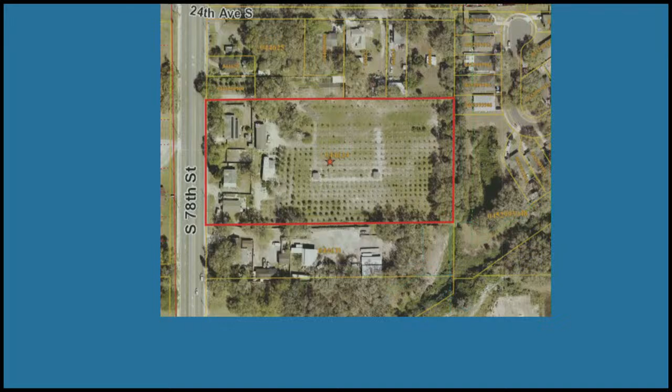Located in the southeast part of the county, north of Causeway on 78th Street, a little closer view on 78th Street. Zoning in the area is RSC 9, which as you can see is somewhat the predominant, and then you get into more intensive categories of CN and CG, which are pink or orange on the map. Future land use categories primarily are all R9 in the vicinity and R20, which you can see in the map somewhat in the vicinity.

Outside the coastal high hazard area, some policies that are germane to it include locating housing with transportation infrastructure. The site is located directly on one main route of Hart, which runs out to Brandon and downtown.

This would encourage a variety of housing types and provide a different type of housing stock in the immediate area to diversify housing stock.

Other policies are to encourage new infill and redevelopment compatible with existing community patterns, and encourage availability of affordable, attainable, privately-owned housing stock that is safe, decent, compatible, and accommodates all modes of transportation, which we indicated is located on a main bus route. Under the Greater Palm River Community Plan, it is located as shown here on 78th, which is a mixed-use business, office, and residential pedestrian-oriented development area.

We appreciate your attention and are happy to answer any questions you might have.

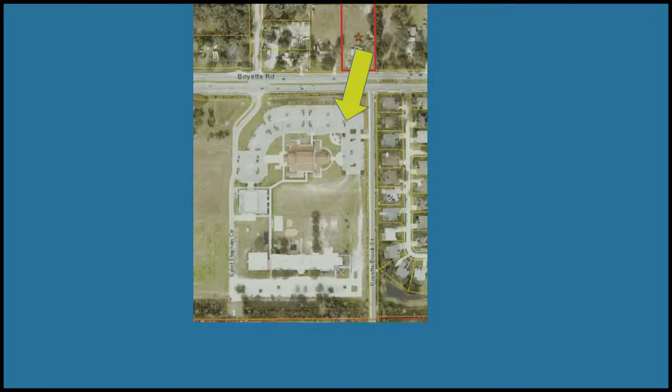Now what's important, and really the biggest change in the area, is directly across the street, which is the church, which has quite a few extensive uses. It is quite a large campus and quite a large impact.

That was approved under RZ000622. You can see there's quite a wide array of uses approved. Looking at their site plan, directly across the street is a sports field, 58,000 square foot school, 16,000 square foot field house, 31,000 square foot Parish Life Center, 7,100 square foot youth building, office, church with 300 seats, and a 105 bed ALF. So it is quite extensive and quite impactful.

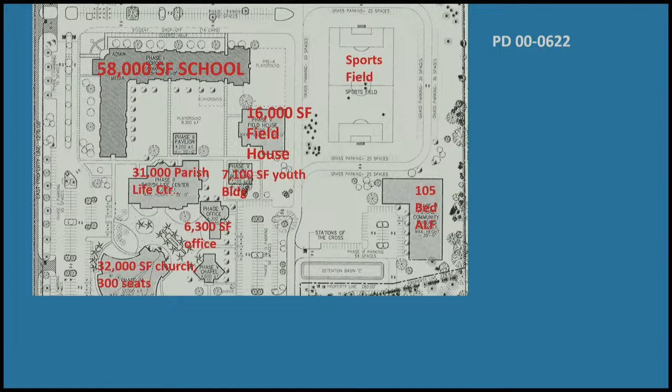As that came through the process, very importantly, there were no residential appearance requirements as were required across the street. The condition is specific that they just be architecturally finished on all sides, which is much different than what's occurring on the site before you.

As this came through 000622, both land use staffs approved it. The zoning administrator found it approvable, and the planning commission found it consistent.

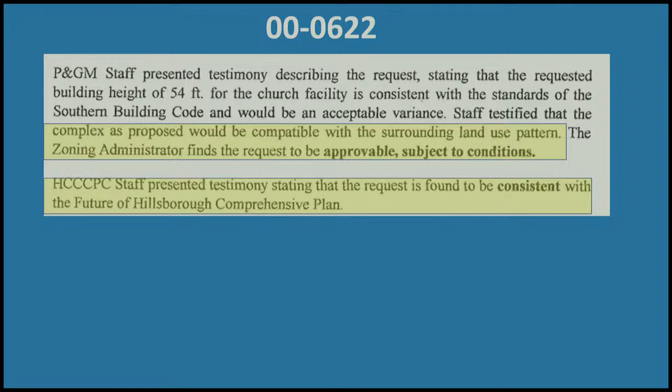As far as we can see, the uses proposed here are basically the same intensity as across the street. They have quite a large sports field and a 600 student school, and what's proposed here is small in scale: dance studio, health practitioner. They're not the same, but in terms of what was approved and supported by the entire county, basically roughly the same.

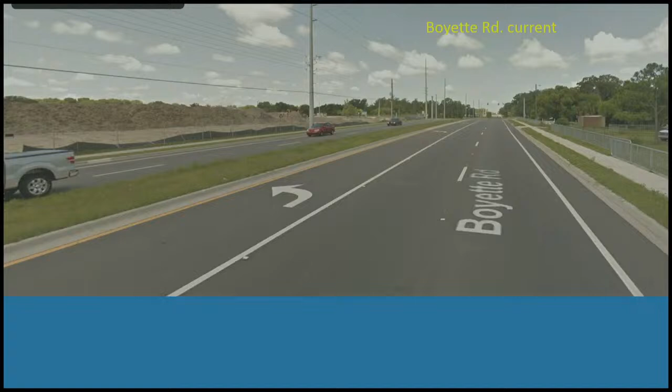Now, we don't meet locational criteria, but we placed a waiver based upon the evolving advancements, the changes, the expansion, the allowed uses, and the intensity that has occurred over almost two decades. The Planning Commission report notes that's basically how we justify these changes.

They refer to it strictly as the business properties and church across the street, which I've shown you is actually much, much more, many times more than just a church. Development Services notes the surrounding uses are single family, institutional, agricultural, office, and commercial scattered along Boyette Road. We think that's a definition that's within the ballpark.

Planning Commission has a different view, referring to the given surrounding residential and lower intensity office development pattern. When you look at the Planning Commission report, they look at what's to the south as just educational, although we've shown it is many times the intensity, many times the usage than just educational. They note to the east, single-family residential agriculture, although that's changing, and to the west, single-family residential, which is also changing.

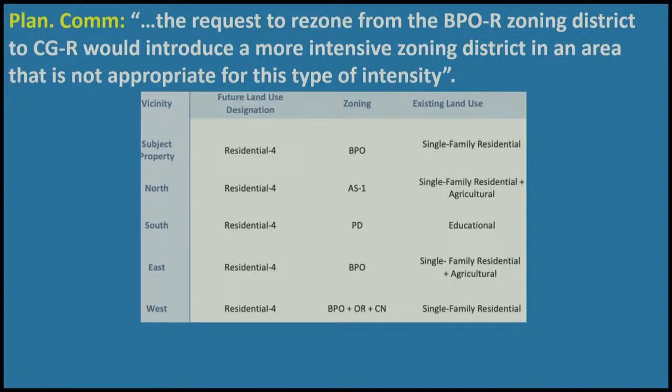The community plan under the residential district vision does note that managed growth does permit higher densities, which we believe supports the increase of FAR from 0.20 to 0.25.

The Planning Commission also notes that Res 4 allows for the consideration of many uses: residential, suburban scale neighborhood commercial, office uses, multi-purpose projects, which we meet. Yet at the same time, they say the intent of the residential 4 category is to designate only low-density residential development. So with respect to the Planning Commission, we look at how they are presenting that Res 4 category, and clearly it is the first that does allow suburban scale neighborhood commercial.

We are a little bit at odds with transportation. In our posture, this is a standard application. No transportation study is required for submittal. The issues they raise are to be addressed at permitting and site planning.

They are indicating that they feel a right turn lane is required. We did look at that quickly as we got those comments, and our transportation consultant, who I asked to look at that, said no, that would not be required. Driveway spacing, Euclidean—all those projects with driveway spacing go through a variance.

It's very common, but those are issues, as far as we're concerned, that are to be handled and looked at and considered after a zoning entitlement under standard application. So with that, we feel that when you look at the whole site and the uses approved and supported by the county, this is a request that is compatible and cohesive.

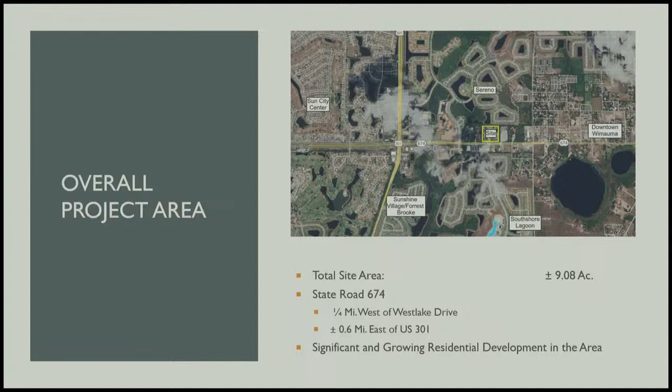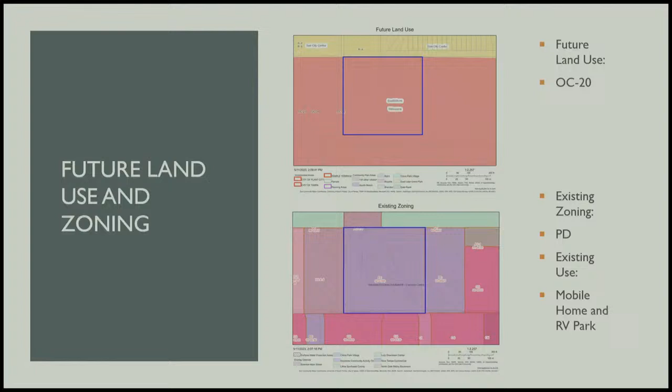The existing future land use is OC20. The existing zoning is a PD. The existing use is a mobile home and RV park.

As far as what we're proposing, there are 2 options. The first option is simply to maintain the RV and mobile home park as an interim use. Mainly that was required because otherwise it would be a non-conforming use once the project gets approved. So the main project proposes 10,000 square feet of office, 21,000 square feet of retail, and 105,000 square feet of mini warehouse.

We've worked on this quite a bit. The Wimauma downtown plan is very exhaustive. There are many things in there, so we have really made a lot of changes to the plan.

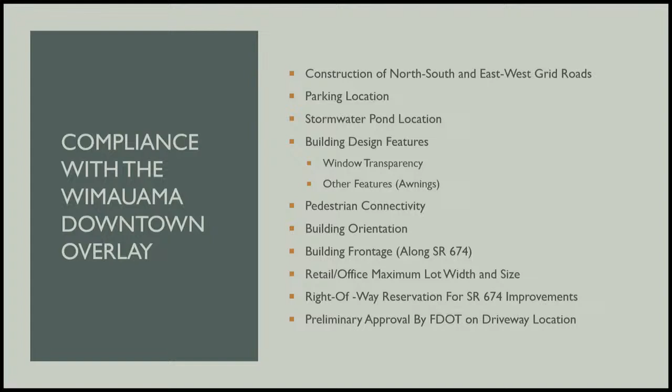They include that we are not just dedicating right-of-way, but we're building north-south and east-west grid roads that are called for in the Wimauama plan. We're compliant with the site planning as far as parking locations, stormwater pond locations, building design features, pedestrian connectivity, building orientation, and building frontage along 674, as well as retail and office maximum lot size and width. We're providing 26 feet of right-of-way for future widening of State Road 674, and we have preliminary approval by FDOT for the driveway location.

Because the Wimauama plan is so exhaustive, we worked it down to where we just have a handful of waivers required. They mainly apply to the mini warehouse. For example, the code has a maximum lot size and maximum lot width, and because the mini warehouse won't fit those standards, we're asking for that to be waived.

We're asking for an increased building setback also for the mini warehouse. That is mainly due to site planning—we need a drive that circulates around the building with loading, and then you would need buffers and a sidewalk, and so that's why we needed to ask for the increased building setback. There's also increased door separation, in case the mini warehouse needs a door further apart than 75 feet.

We're requesting one variation, and that is just for the scenic corridor plantings. It's not that there won't be any plantings, but all the buildings on 674 are oriented towards 674. They have sidewalk connections to the sidewalks, building entrances, and 75% window transparency. There's a lot going on, and the scenic corridor plantings, as they're written, were not something we could fit—if we tried to fit them, they literally would block the buildings. Staff has okayed that.

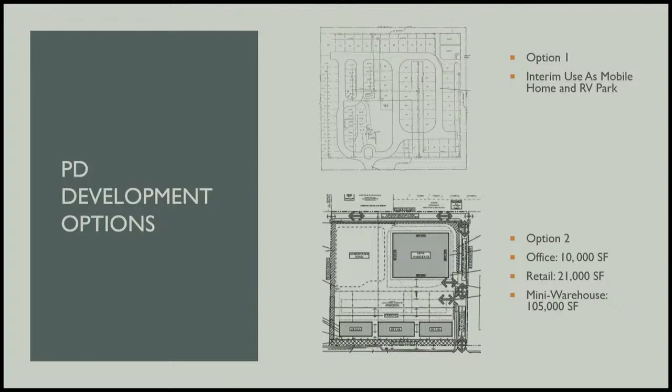Understood. All right, anything else you want to add before we close? No, I think that's it. All right, thank you for your time and testimony, I appreciate it. With that, we'll close major modification 24-0034 and go to the next case.

Our next application is item D2, PD rezoning 24-0124. The applicant is requesting a rezoning from ASC1 to PD. Chris Granlenard with Development Services will provide staff findings after the applicant's presentation. You should have received a revised staff report which specifies for the townhomes a lower building height and proposes enhanced buffering and screening.

Is that a change in the conditions? On the first page, you'll see it's a change in the height, and given the time it was provided to us, the conditions state as shown on the site plan is how the buffering and screening should be provided. So as a requirement for certification, they're going to need to match what it is that they're proposing. Okay, understood, thank you so much.

Good evening. Good evening. I have information for the record that I need to submit right now. Okay, you can submit it to the clerk right there, and she will get it to me as part of the record. Give us your name and address.

202 Windward Passage. Sir, you need to speak into the microphone. Ali Halawi, 202 Windward Passage, Clearwater Beach, 33767. Go ahead. I'll be taking the lead here. Tim Healy, Frontier Engineering, 803 North Howard Avenue, Tampa, Florida, 33606.

It is the owner's vision to create a development which provides quality residential housing at an affordable price to a community experiencing population growth and demand for these residential units. Currently the area is undergoing housing construction. Two lots to the south, and the parcel immediately to the south will be rezoned, which it has been. We were the engineering development agents for that development to the south, and that plan was for a 76 residential unit subdivision.

So this development, I think, is a good mix to the community. It adheres to, kind of to the east is Woodland, the Woodland Acres, and you can see we have a mix of duplex and multifamily development, townhomes.

So just going through the engineering aspects of this, we have a connection to Sly Avenue, which was required by Transportation Department. We also have a connection to Elm Street, which was required by your Transportation Department. We worked with Jillian on the density, and we are a few units short of the credits included on the density, but with 71 units that was acceptable to staff.

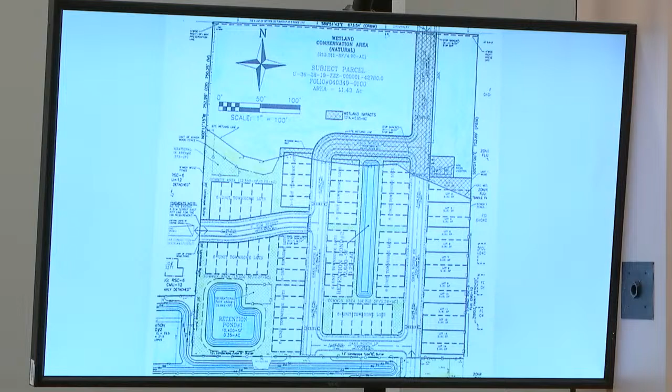Okay, and then my last question, I see in the narrative of the staff report you're asking for what I believe is a waiver regarding the 2-to-1 additional setback for buildings 20 feet or higher. Is that correct? That is correct. The owner is committed only to 27.5 feet.

And it's just for this two-story, and Ali said, just to cover ourselves, it's probably going to come under, but right now for the product they're looking for, they requested 27.5. Carla looked at that and said you need 15-foot trees instead of 10. So the applicant complied. Those were my questions, that's all I had.

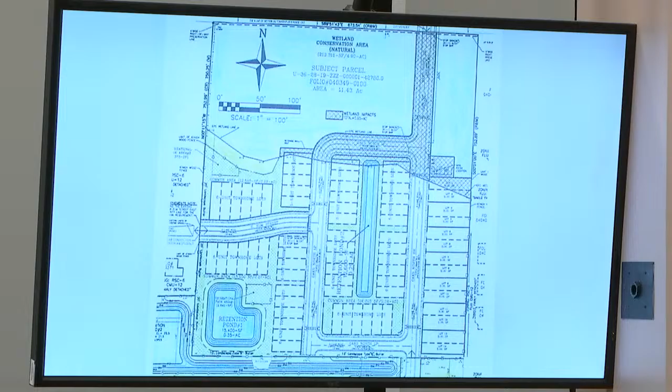Good evening. Chris Growlenard, Development Services. I'm here to present PD 24-0124. The applicant proposes development of a mixed residential development consisting of 71 total dwelling units, 14 units of attached two-family duplex dwelling units, and 57 units of attached single-family townhome dwelling units. The resulting density will be approximately 6.21 dwelling units per acre.

The approximate 11.43 acre vacant parcel is zoned ASC 1. The subject property is located at 7819 East Elm Street, Tampa. The area consists of single-family residential. The variations requested, there are two.

The first is a variation to section 6.06.06 to allow for a 10-foot buffer where a 20-foot buffer is required, located south of retention pond number 1. The second variation to section 6.06.06 is to allow for a 13-foot buffer where a 20-foot buffer is required, located south of the southernmost drive aisle.

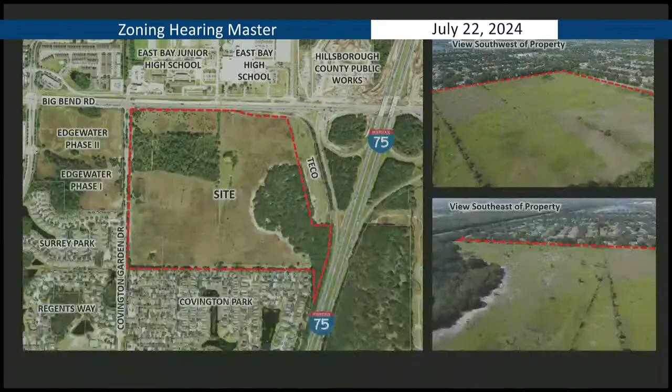As indicated, this is a major modification to the site, which is located on Big Bend Road and I-75. There are existing entitlements for extensive commercial and office entitlements, but we are proposing to transform this site into a very unique destination, which will be one of a kind in Hillsborough County. To present that vision to you, I'd like to ask Sam Stark from LC Communities to come up and present, and he'll be followed by our planner from Level Up. Thank you. If you could please sign in.

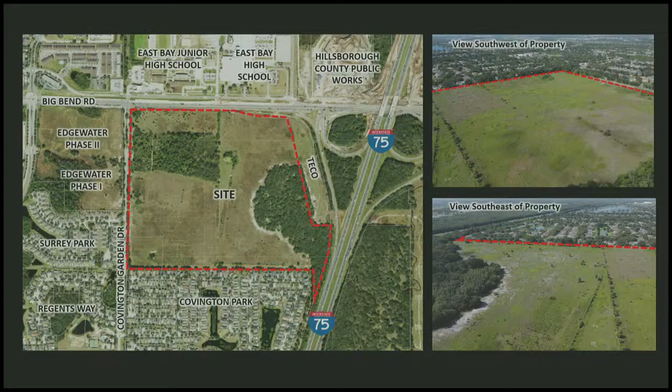Good evening. Good evening. Thank you. If you could give us your name and address to start. Sam Stark, 5776 Royal Lytham Court, Dublin, Ohio, 43017. Thank you so much. Go ahead.

I've been with LC for going on 21 years. The company was founded in 1996. I want to spend a few minutes telling you why LC is different and what we do to bring a sense of community and place to the projects that we build. We're not just another typical real estate developer, real estate company, gym, or restaurant. We've built a brand that is really foundational to bringing people together through participation-driven communities.

We've built over 25 communities, 15,000 homes, and really the difference that LC brings to the table is about creating place through our amenities and creating connections. We call that home and hospitality, and we're really inspired by a lot of the hospitality business, single-family homes, and communities and neighborhoods. So the foundation of how we create a program is we have a restaurant.

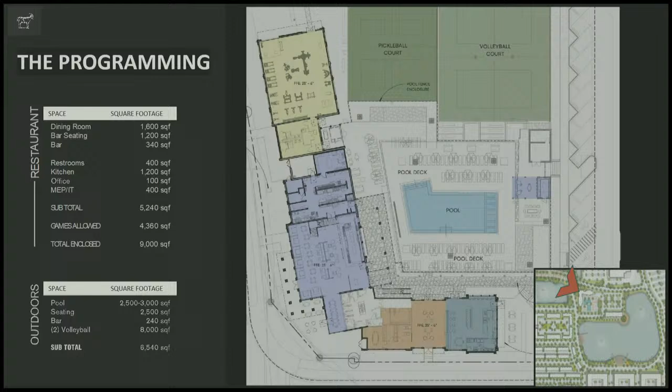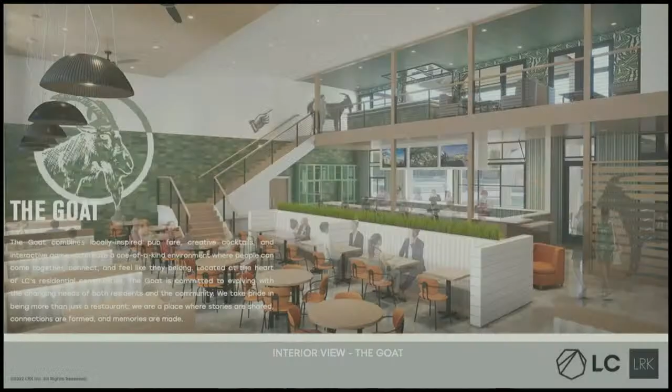This is a snapshot of the inside of typically what we would build. We build this on a 1-story and 2-story, and this has a mezzanine. Morning Ritual, showing you some of the retail frontage and what you would expect. This is one of our communities that we built in Central Ohio.

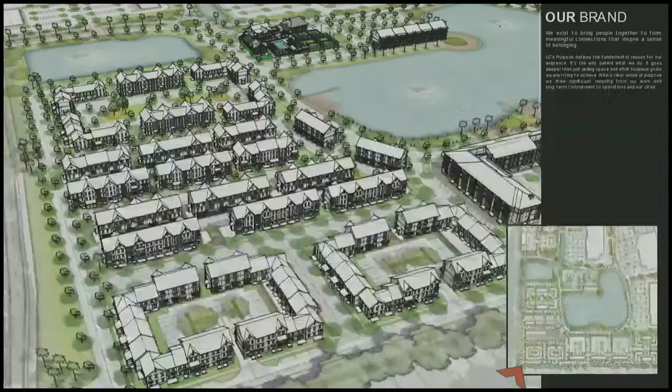Changing gears a little bit, this is a bird's eye view looking from the south to the north, the residential side of what LC brings to our communities. We're primarily a townhouse builder. We believe in TND style of development. Parking is in the rears, 1- and 2-car garages, everything's alley loaded, as you can see.

Tree lawns and sidewalks that are 5 to 6 feet wide, so that you can create engagement on the street with your neighbor. This is kind of a look back the other way over the central lake. You're getting a little snapshot of one of the 2 central gathering places that we've identified in the plan.

Again, just giving you a sense, but these are our buildings. We've been building these buildings for the last 20+ years. We took some of the architectural elements off of it, but we want to figure out what's really important to the area and connect with materials and some of the designs locally.

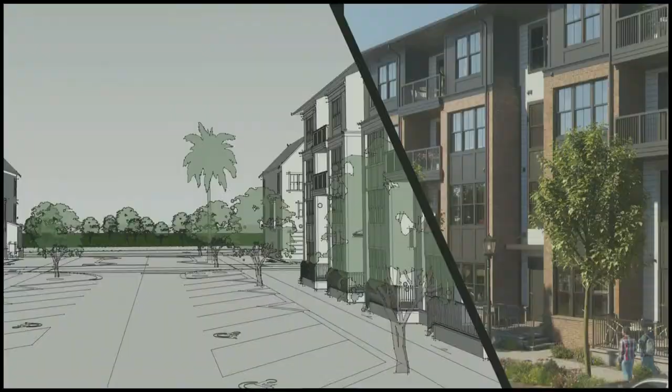This is going to give you our vision of the Central Lake amenity and promenade, so you're really getting a sense of both of those gathering spaces. This would be a good example of our streetscape. This is right out of construction documents that we rendered in SketchUp, so you get a real sense of what this would look like. Same thing here, you're getting another good sense of what this would look like.

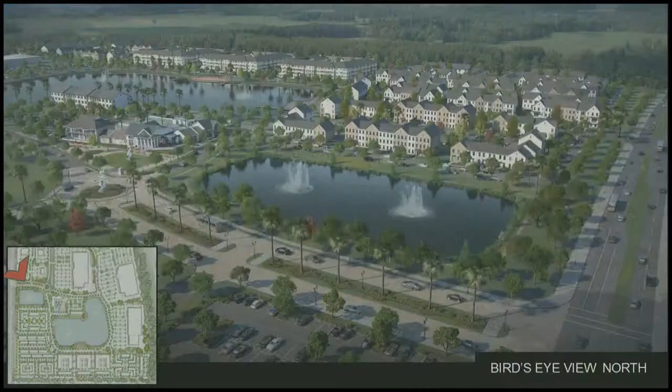And then the last image is really seeing all of those things come together between the restaurant, the walking paths, the gathering spaces, the central lake, and the townhouses and the streetscape as you look down Covington Boulevard and that entrance there.

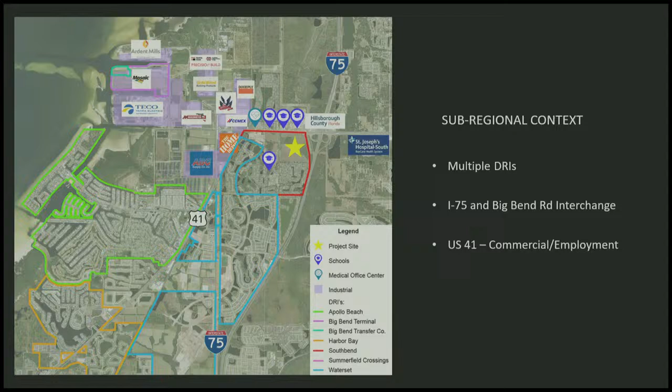The sub-regional growth shapers impacting our site include area or nearby DRIs, the interchange of I-75 and Big Bend Road, and a concentration of commercial and heavier employment type uses to the west.

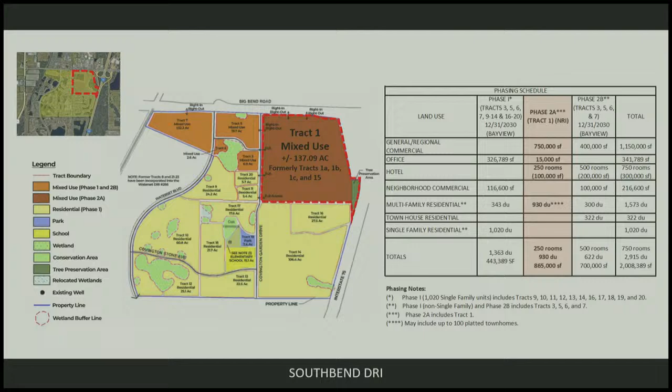Concurrent with this major modification is an amendment to the Southbend DRI that's being reviewed as a PRS. The modification implements a distinct vision for the property, substantially provided for or described by Sam. It's also responsive to changing market conditions. It subtracts commercial and office intensity and adds residential density, resulting in a mixed-use community appropriately scaled to the site characteristics as well as the location.

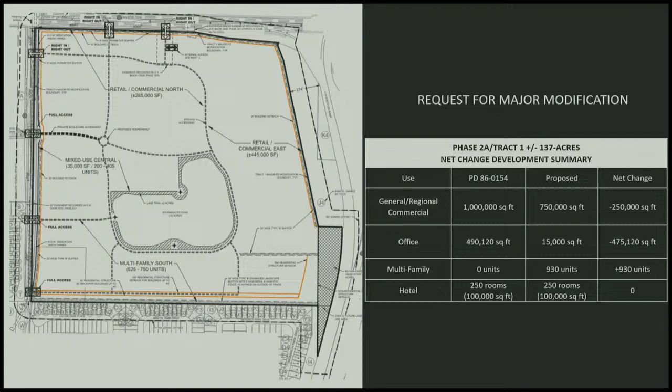A major unifying design theme, as you can see on the plan, is the central lake amenity that is encircled by a walkway and includes two gathering spaces. There's two access points on Big Bend Road, and four access points on Covington, with the main access point being sort of midpoint on Covington.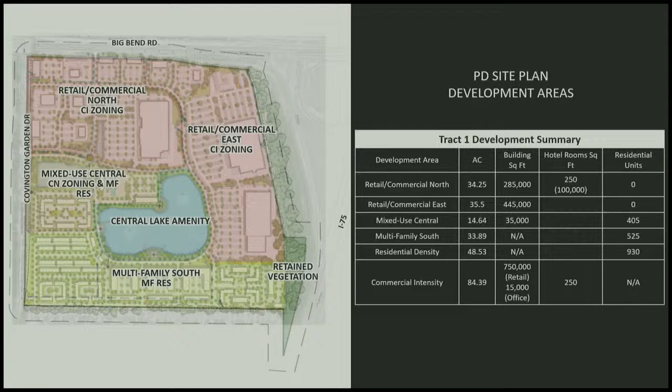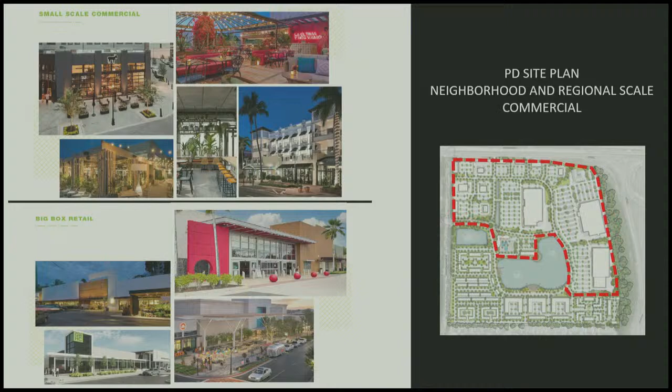Given the size and location, the project supports both neighborhood and regional scale commercial development. We've outlined those areas where those features are shown, and I think it's fairly clear that the regional scale commercial is in significant demand in this part of the county.

Consistent with good design practices and given the adjacent residential land uses, the plan provides for transition in intensity from north to south. It kind of mimics what I said previously about the commercial there along I-75 and Big Bend Road, and then we transition to what Sam described in substantially more detail to the south.

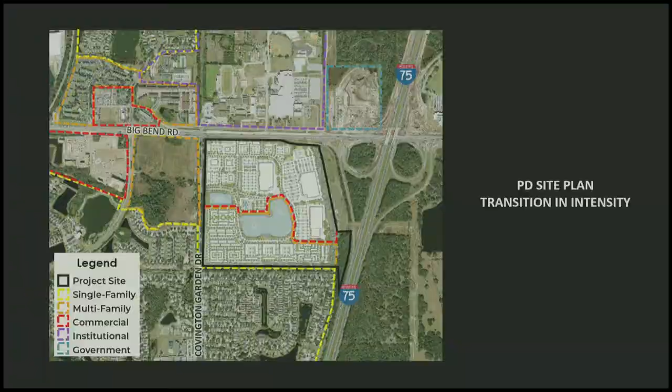The request includes two variances and a design exception. The variance marginally reduces the parking for the big box type use, primarily justified by internal capture. A second variance reduces the driveway length for the easternmost access on Big Bend Road to facilitate access. The design exception provides for a modified TND street section with on-street parking that fits the scale of the possible platted townhomes, and all three are approvable.

I think the record is clear that we're consistent with the plan and compatible with adjacent development. Thank you. Thank you so much.

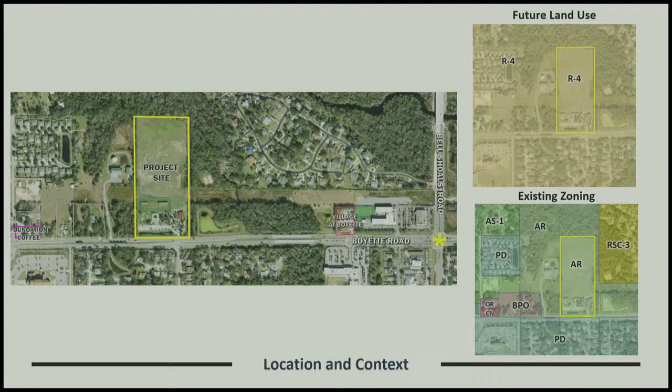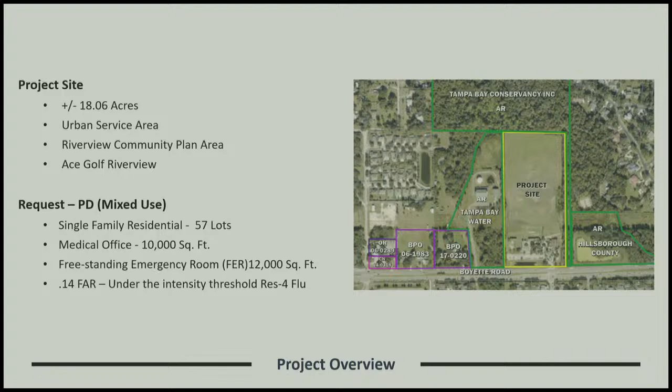What we are proposing this evening is a change and a reduction to the entitlements that were requested in that prior request. We're asking for 57 single-family lots and a medical office of 10,000 square feet, and then a freestanding emergency room of 12,000 square feet.

And with respect to the commercial, we've simplified it. Under the previous request, there was a density bonus involved - a mixed-use density bonus which required 2 separate commercial uses. This request does not require 2 separate commercial uses, so we're able to have 2 complementary uses of a medical office and a freestanding emergency room. So instead of having both a retail and an office component, we have the 2 medical office uses which are compatible.

And then really the only area of contention that we've had - and we give our team a lot of credit for working really hard to work with the neighbors - we did not approach this in a vacuum. They wanted to be certain that the surrounding community did support this request before they brought it forward, and they met personally with members of the Conservancy, the Waterford Homeowners Association, residents who live across to the south on Boyette, and were able to achieve support from all of those entities who previously did not support the request.

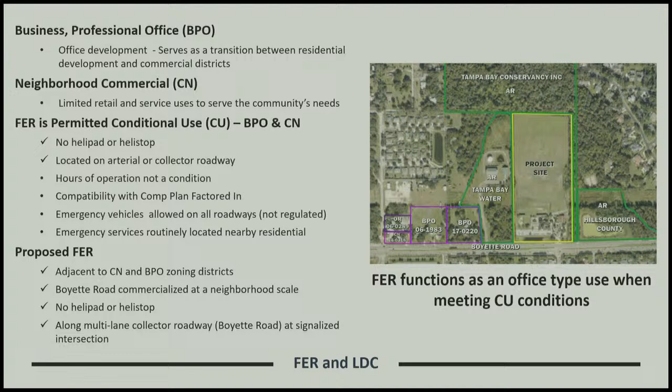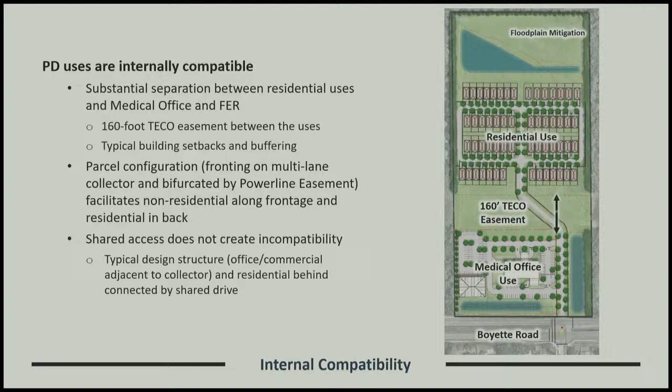There is shared access at the existing signal. Shared access is consistent with planned developments that front on a major roadway and are deep, so it's not uncommon to have shared access where you have commercial on the front and residential in the back.

It's also compatible externally. There are no residential uses directly abutting the site; public or park type uses abut on all four sides if you include the 100-foot right-of-way for Boyette Road. Internal to the site, there's additional buffering.

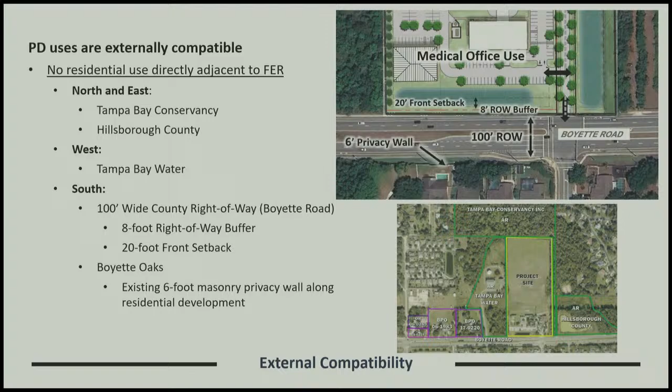There's additional right-of-way dedication and buffering, along with the traditional building setbacks internal and adjacent to Boyette Road. Opposite Boyette, within the neighborhood called Boyette Oaks, there's an existing masonry wall directly adjacent to Boyette Road, so the community itself is already buffering itself from Boyette Road.

Getting back to the commercial location standards, policy 22.6 includes exceptions for office type uses, and I'll respond to each of those points. One, the obvious thing is it's less than 5 acres. It also provides an appropriate transition and buffer from Boyette Road, nearby non-residential uses, and also provides internal buffering between the commercial frontage and the residential to the rear. Given the pattern of non-residential development along Boyette Road in the vicinity, and limitations given primarily because of the power line easement, I think it's clear that residential is not suitable where we are proposing the office medical use.

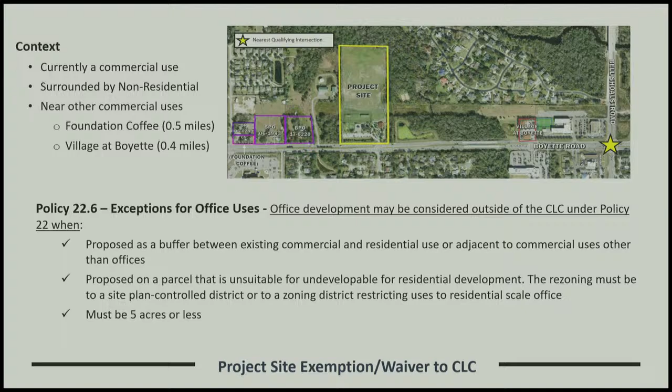By way of an example is BPO 170220, highlighted here in purple. It's located further away from the nearest qualifying intersection. A couple findings in that case from the Planning Commission were that these BPO parcels continue a pattern of non-residential development along this portion of Boyette Road, and also that it does not meet locational criteria but qualifies for an exception for office uses. We think the same logic applies here for our project as well.

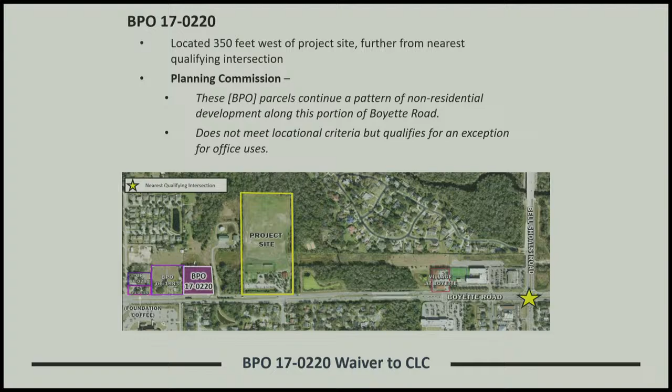The record supports consistency with the comp plan and compatibility with adjacent development.

Thank you very much. Let me just ask you one thing to clarify for the record. Would it be fair to say that your analysis is that the freestanding emergency room functions differently than the emergency room that's typically attached to a hospital? Yes, and it functions more in an office capacity because it receives less intense, less traumatic clients, and it doesn't have the overnight stays or other characteristics that differentiate it from a traditional ER at a hospital. Thank you, that's what I needed.

Thank you very much. If you could please sign in.

Cami Corbett again for the record. And to that point, both Polk County and Pasco County treat freestanding emergency rooms as a medical office, so it's very similar. I want to place into the record an email from the Gibbons family indicating that we can advise the hearing officer that their family does not object to the proposed site plan, and I'll be placing that into the record. One last photo I want to put on the Elmo.

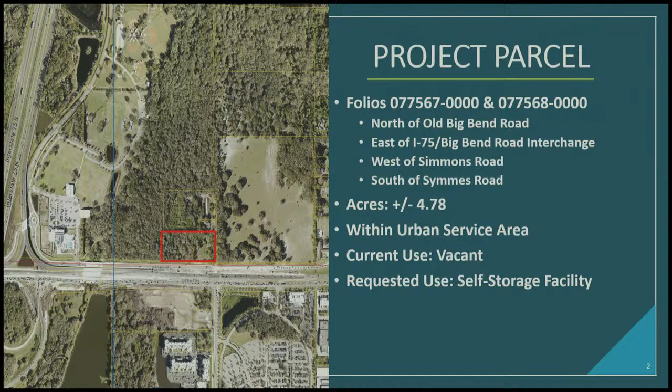A lot has been happening in this area relative to the frontage road, and let me give you some context of how we fit into that on the map. Our development is at this intersection -- here's Old Big Bend Road, here is Simmons. Most recently, Camden came in for a very large rezoning on the old HCA hospital site. It had multifamily, multiple commercial uses, some medical warehousing and production -- quite a large development. As part of their development, they agreed to a series of conditions to realign Old Big Bend Road, connect a new connection to Lincoln Road, and eventually provide a direct connection, a new intersection for Simmons at Big Bend. Our project is right at the intersection, or the epicenter of the future intersection -- it's this piece right here.

As part of our development, I can go back to the presentation. So as Mr. Smith, if you could bring that microphone back with you. Yep, there you go, perfect.

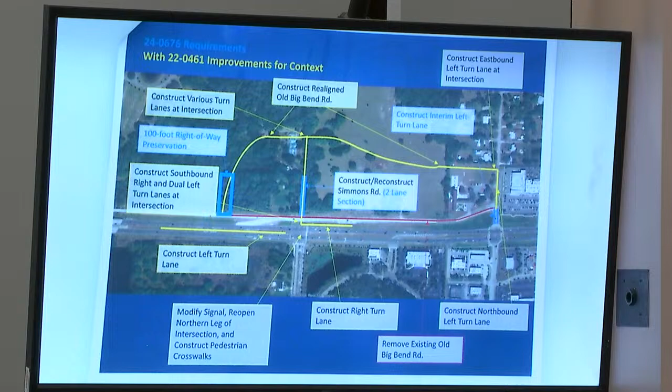Thank you. When we look at this, we have UMU 20 future land use, which allows 1.0 FAR. Right now we have agricultural zoning. The Camden PD 220461 is immediately to our east. There had been a previous rezoning at this whole corner which has basically been withdrawn, and the northern part of that old rezoning on the same side of the street as us will be coming in separately for a PD. This gives you the overall context in the community plan -- it's in the area-wide South Shore community plan, and also in the Riverview community plan. This area is really set up for a mixed-use residential transition area along the heavily traveled Old Big Bend Road.

This is the site plan for the development. It's a mini warehouse facility at 0.78 FAR. The location and its access -- you can see in the site plan the red striped area, that's the right-of-way being dedicated to the county for the ultimate development of the future section that incorporates the Camden improvements. We're also going to be building 2 lanes of Simmons Road to kind of kickstart that activity. We're not sure how long it will take to get the realignment of Old Big Bend Road in place. However, our development generates so few trips that it's able to move forward at this time with only one mitigation: striping a northbound left turn lane on Lincoln, which is the pinch point in this area.

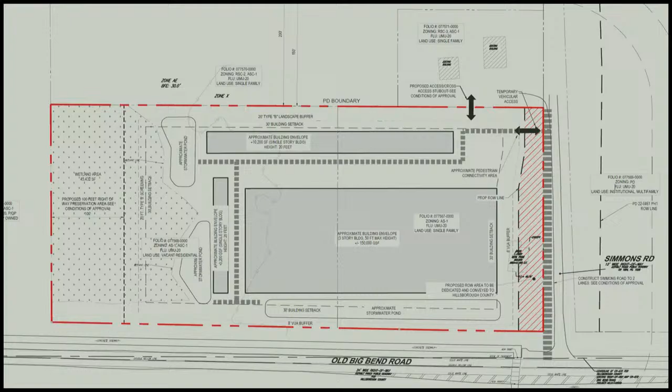As previewed, we have a main building height of a maximum of 50 feet, and single-story buildings with a maximum of 20 feet, compliant with all special requirements for mini warehouse development within the LDC. We have a 20-foot type B buffer on the north and west, and setbacks of 30 feet on all sides.

On the far western side of the property, we have a preservation area put in place to support the realignment of Old Big Bend Road when that should occur. This property made extra effort to ensure it wasn't an impediment, but would further that realignment, which is in the county's plans and also needed for Camden to develop their project.

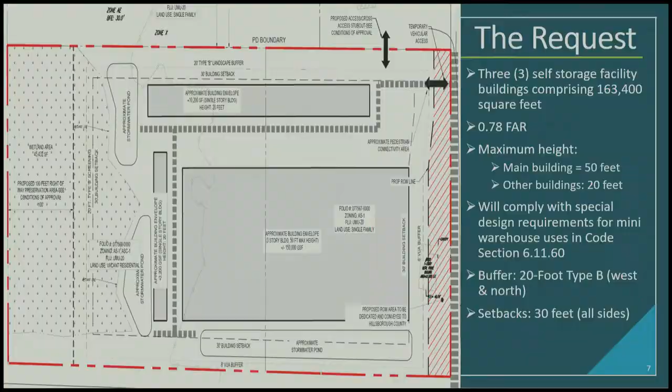Surrounding us, we have future land use categories of UMU 20 to the north, south, and east. We have PQP, which is the county park. The Y is a large piece of property and is pretty far away, but the park land is immediately abutting our property on the west side.

We've included in the application an exhibit. This is not part of the certified plan, but it gives a picture of what's happening out here relative to the eventual development of a connection to Big Bend Road with a new intersection. In the upper right-hand corner, our access will be directly to the improved Simmons Road.

That condition will continue until other improvements to Simmons Road are made by Camden as they move forward with their phasing. At such time as that happens, and we get to phase 3, we've already provided for cross-access or shared access opportunity to the property owner to the north.

When the full section of Simmons is improved, you can see the left turn, kind of a U-turn made available, a median cut. We will close our access point, and our access will then be together with the property owner to the north. When that property becomes zoned and developed, they will have a companion requirement to provide access at that left turn in the phase 4 condition.

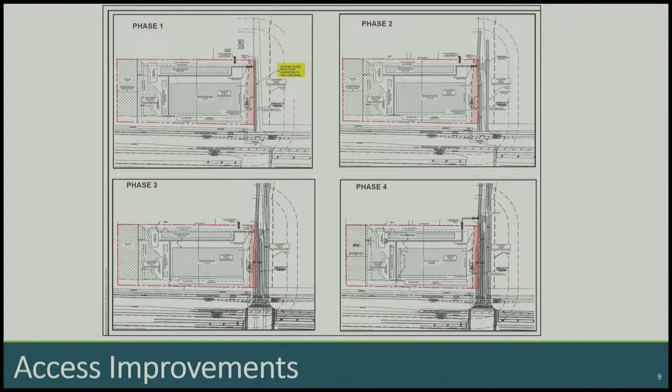So when we come in and build our site plan, it will be phase 1, and we'll have our access to Simmons. This is trying to show visually how this will not interfere with or complicate the ultimate build-out and realignment of Old Big Bend and the widening of Simmons. We're providing the right-of-way and building a couple of lanes that can be utilized as part of that section at ultimate build-out. When all the turn lanes are in and this median cut is put in place, our access will close and we'll utilize shared access to that median cut. Understood, thank you for that.

We do have some variations, and they're quite simple. We have a variation from the Old Big Bend frontage road substandard road requirements, which county engineers found approvable. We also have a design exception to the typical road section, really the Simmons loop or Simmons Road standards. It was found that developing the two lanes with the 10-foot sidewalk in that section, rather than the typical TS4 section, would further the ultimate build-out better than building a TS4 section.

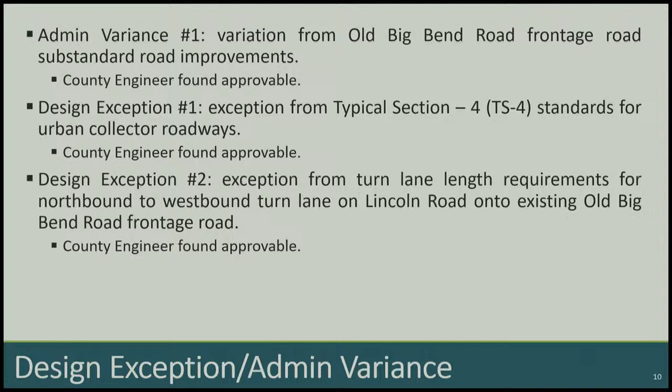Design exception 2 is from the turn lane lengths for northbound to westbound, again tied to the Lincoln Road mitigation. Because of the low number of trips we generate, we're allowed to move forward without anything else happening other than the improvements we're putting in place with the mitigation on Lincoln Road. A county engineer found that approvable.

So the only variation to the actual code is really in response to a request from staff. Staff has asked us to make that stub-out connection to the northern property line with our first increment of development. We're only going to have one increment, so we'll come in and get our construction plan approved, build the self-storage facility, and construct our access to Simmons.

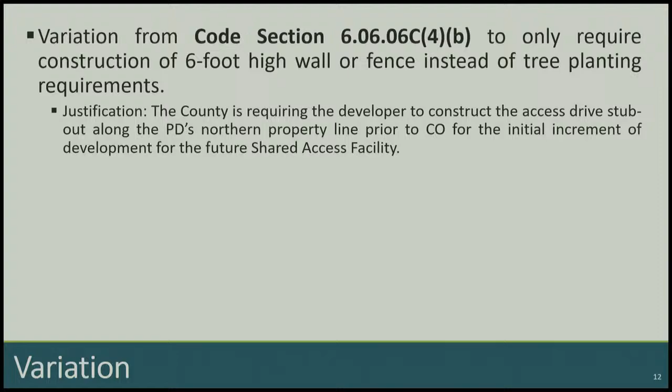And then also construct the stub-out to our northern property line. In order to do that, we had this variation request needed to allow us to just put a fence in that section where the stub-out is going, and also not to have to plant trees that will eventually have to be torn out at that point. So that's the only variation being requested for this project.

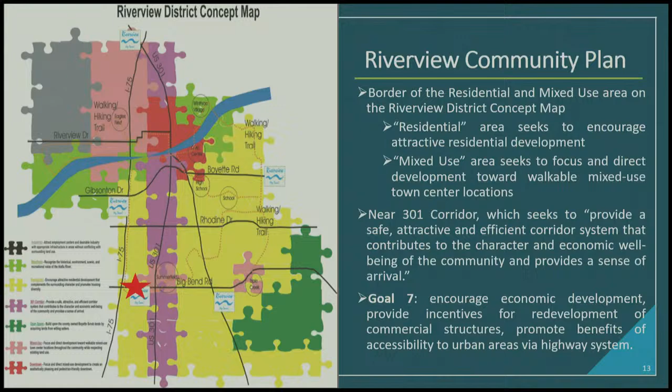Again, the South Shore area-wide systems plan is quite a large plan, but we're consistent with that. We're coordinating transportation planning to accommodate future development and protect future rights-of-way. We're dedicating right-of-way, preserving corridors, and constructing portions of the ultimate sections that's expected here.

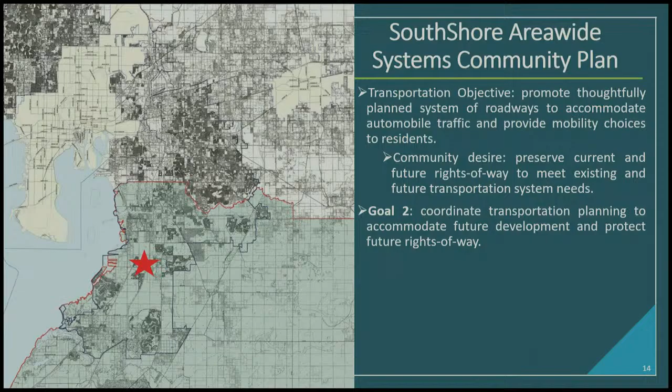I won't go through all the policies, but we are consistent with numerous objectives of the comprehensive plan, the community design components.

When you look at staff's review, they found it approvable subject to conditions. They found it to provide ample buffering and screening. The location of the 50-foot building is in line with where a 2-to-1 setback would otherwise apply, noting that the development to our north right now is not zoned, but for agricultural, so that buffer and setback would kick in. And the site is on a major roadway and is surrounded by other non-residential uses and multifamily.

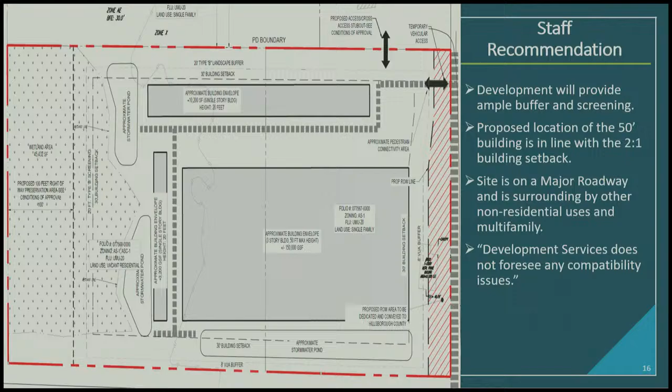Planning Commission and Development Services staff found it approvable subject to conditions. Planning Commission found it consistent with the comprehensive plan, and we're glad to answer any questions, but we would respectfully ask for a recommendation for approval. We have our full team here and the developer as well to answer any questions.

The only question I had pertained to that PD variation, but your slide explained it perfectly. Okay, so that's it. Great, thank you so much. Don't forget to sign in.

Good afternoon, this is Jared Follins, Development Services. So yes, this is a request to rezone a parcel to planned development to facilitate the development of mini warehouses comprised of 3 buildings with a total square footage of 163,400 feet.

For context, the majority of the surrounding area is undeveloped, but it does consist of zoning districts such as agricultural, commercial, residential, and PD zoning districts. There is a large PD to the east and to the south. To the east, this large PD is undeveloped, but it was recently approved in 2022, and this PD allows for medical uses, a freestanding emergency room, and also 900 multifamily units.

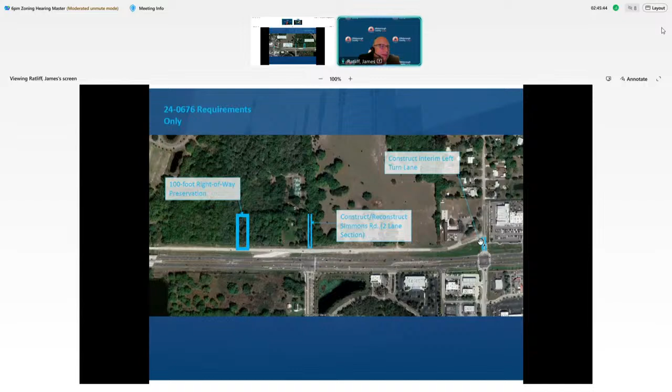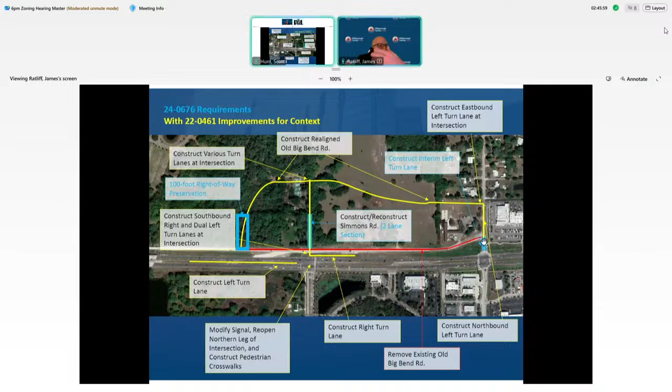So again, just showing those 3 improvements. We've got those 2 I just mentioned, and then the interim turn lane here at Lincoln Road, northbound. It's called interim because in the ultimate condition, old Big Bend Road in its current location will be removed in favor of the plan to push this realigned old Big Bend Road further to the north. So this turn lane is temporary until such time as the rest of the elements of this plan are effectuated.

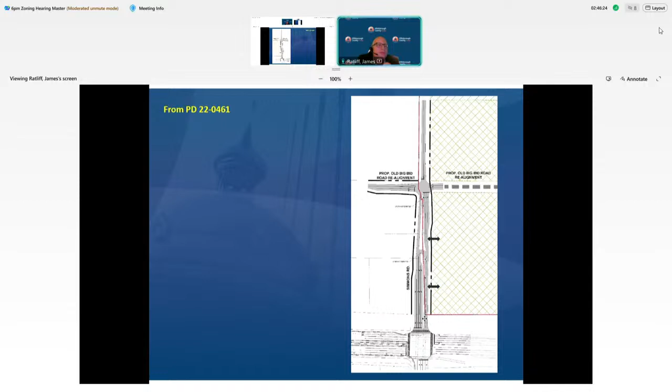Just 2 more slides for you here. This is showing an excerpt from the 22-0461 regulatory plan that shows a little more detail of what that intersection is going to look like in its ultimate configuration. And again, this developer will construct two lanes here that will ultimately be used as part of this final configuration.

And the final slide here is just these 2 things put side by side so that as you're going through, if you're trying to figure out what's where, you can compare those 2 things. With that, I'm happy to answer any questions, but I did want to point out one thing.

I think I heard earlier that there was talk about putting a sidewalk option in. I wanted to clarify that it was just cleaning up the language in the condition to call it a sidewalk / MPP or multi-purpose path. The requirement is to construct a 10-foot wide facility regardless of what you call it, and that's consistent with the design exception. I just wanted to clarify that for the record. With that, I'm happy to answer any questions.

So it's an either-or, not one way or the other, is what you're saying? It's a 10-foot wide facility. You could call it a 10-foot wide sidewalk, or a 10-foot wide multi-purpose path. Essentially, it's meant to accommodate both bicyclists and pedestrians, and it will be 10 feet wide. And it's paved in some fashion? Correct. Okay, understood. I appreciate the graphic, that helps. Great.

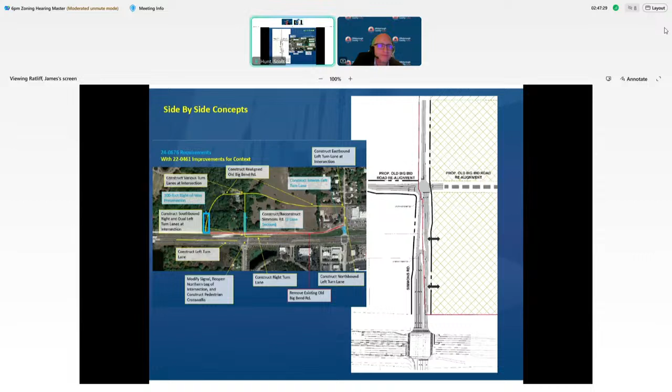Sorry, real quick, I just wanted to mention that there is a single-family home to the north. The development is buffering with a 20-foot type B along that northern boundary, but it is expected that area to the north, including that single-family property, will be redeveloped in the near future. All right, understood. Thank you so much, I appreciate it. Thank you.

Planning Commission, Jillian Massey with Planning Commission staff. The subject site is designated as Urban Mixed Use 20 on the future land use map. It's in the urban service area and located within the Gibsonton, Riverview, and South Shore area-wide systems community plans. Based on the existing development pattern, the proposed storage facilities are compatible with the surrounding area and meet Objective 1 in Policy 1.4. The proposal includes a floor area ratio of 0.69, which is under the maximum intensity of 1.0 considered for this Urban Mixed Use 20 category.

Therefore it meets the intent of Objective 7 and associated policies. The proposal meets the intent of future land use element Objective 16 and accompanying policies requiring new development to be compatible with the surrounding neighborhood. Goal 12 and Objective 12-1 of the community design component of the future land use element require new developments to recognize the existing community and be designed to relate to and be compatible with the predominant character of the surrounding area. In this case, the surrounding land use pattern is a mix of uses, mainly public/quasi-public institutional uses, vacant land, single-family residential, and agriculture.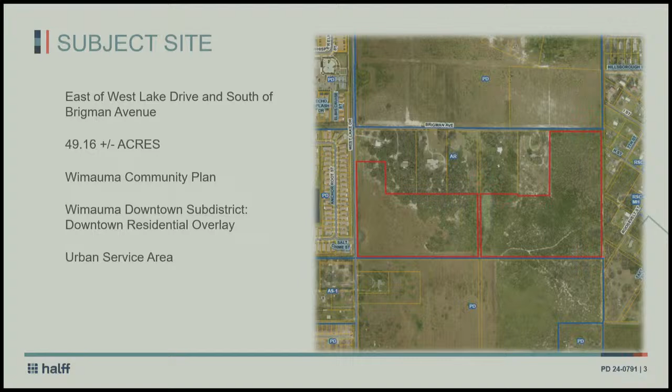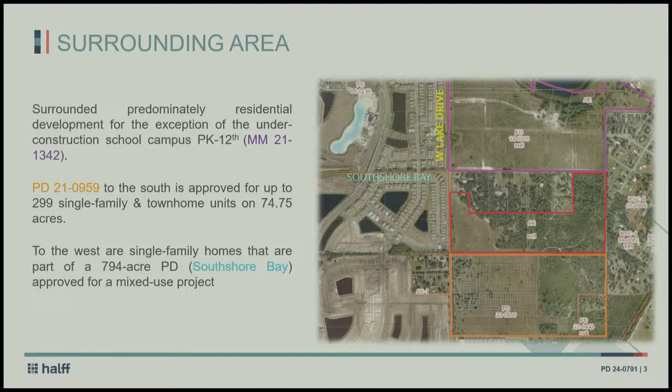And it is also located in the urban service area and also within the Wimauma Downtown Subdistrict, which is the downtown overlay, residential overlay. More specifically, just to zoom out a little bit, the property to the north of us in purple, that is the school board multi-campus school campus, which will have a pre-K to 12th grade. And then just north of that, that little dark area, that's Lake Wimauma. To the south of us is a development that was recently approved for 299 units with a mixture of single-family, residential, and townhomes. And to the west of us is the South Shore Bay, also known as where the lagoon is located. So the area is predominantly residential with some retail commercial.

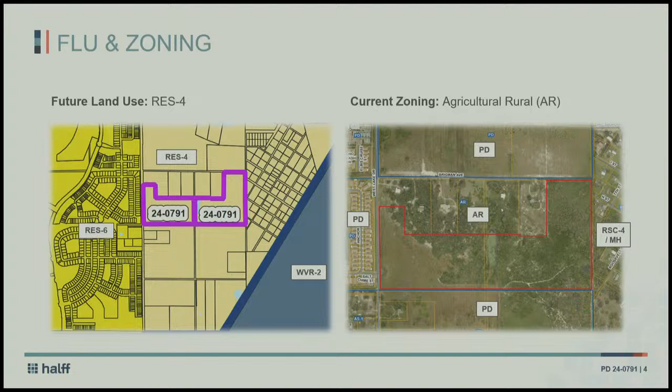The future land use is residential 4 and the comp plan is residential 4 and the zoning is agricultural rural. So here's the request for tonight. This is for residential development, requesting a planned development to allow single-family units on the west side for 72 units.

And on the east side with the more orange shaded area, that's for a row house development, also known as a townhome development. And this is, as I stated earlier, located in the downtown overlay district, and there's these new regulations in the Land Development Code, Section 3.23.00, that has these additional requirements, regulations to develop these sites, which we meet all of them. Part of the request is also requesting a flex of the residential 6, as shown here, and Planning Commission reviewed that and found that we met numerous policies in the comprehensive plan.

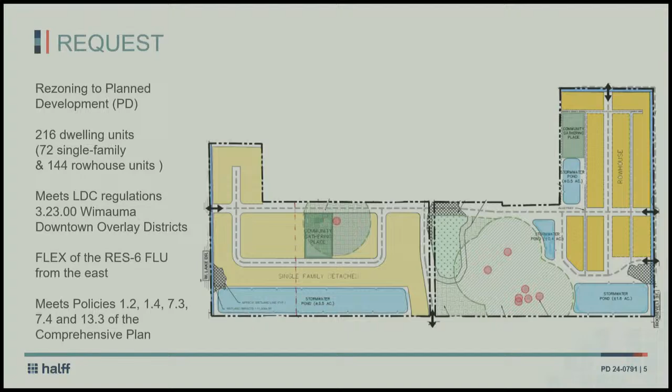And each of these developments will have their own community area, community gathering places. We had a neighborhood meeting back earlier this year, and the main topics of discussion was transportation and environmental.

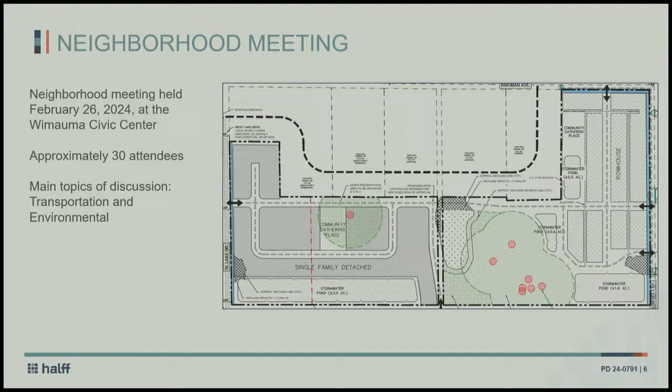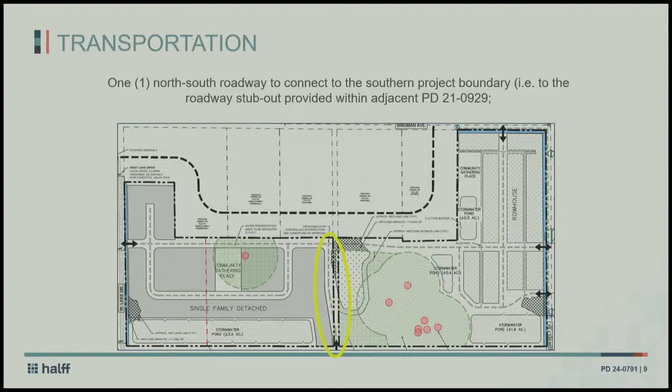Transportation, we are improving Westlake Drive. We did request a design exception, which was found to be approvable. We're also constructing an east-west road to connect from Westlake to the Roosevelt Street to the east. We're also constructing a north-south road in order to connect to the development to the south that I mentioned earlier. We are also going to construct a portion of this road, as well as a portion of that road, and these are all requirements of the new Wimauma regulations.

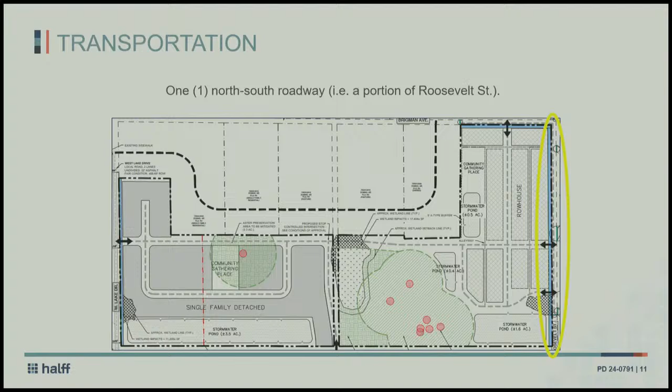In terms of environmental, Clementi environmental consultant, who is here tonight, prepared a wildlife and plant survey report. This property has in the past had some scrub jays, and from review with her and other agencies, they found that there was no scrub jays presence on the site, and that's in the environmental report that's in the record, and I'll submit one again.

But they did find some golden aster, and through work with staff, we were able to increase the preservation area as a compensation area as shown on the site plan. And with that, the work with Ms. Clementi and staff found that approvable.

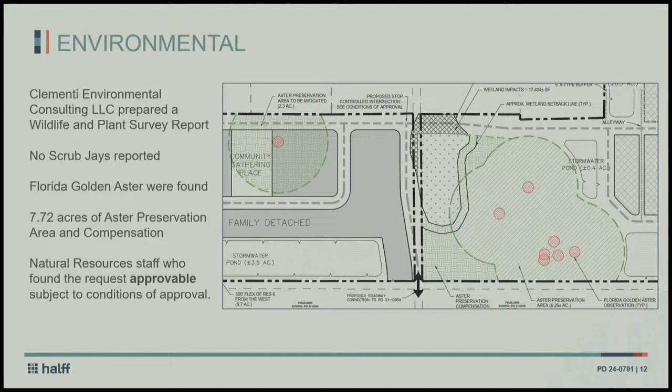Again, all reviewing agency found this application approvable and no objections from anyone from reviewing agencies, and I'm here if you have any questions. No questions at this time, but thank you so much. Don't forget to sign in. Development Services.

Good evening, Tim Lampkin, Development Services. Michelle already mentioned the only revision to the report was changing the date on the cover page and the headers to the August land use meeting.

The applicant is proposing to develop approximately a 49-acre property located on the east side of Westlake Drive and south of Brigman. The request is to rezone from agricultural rural to planned development, proposing 144 row house units and 72 single-family homes for a total of 216 dwellings. As the applicant stated, they're proposing a flex of the Res 6 FLUE from the west to allow the unit count density.

The subject property is surrounded on the north by agricultural and larger lot single-family homes. Immediately south is PD 21-0959, approved in 2022 for up to 299 single-family attached and detached residential units on about 74 acres. That application was filed prior to the effective date of the Wimauma downtown overlay and was not subject to the downtown residential subdistrict requirements. Also south is PD 22-0443, which was subject to the new Wimauma development standards. Together, both approved planned developments to the south have changed the character of the immediate area from a rural character to a more typical suburban character development.

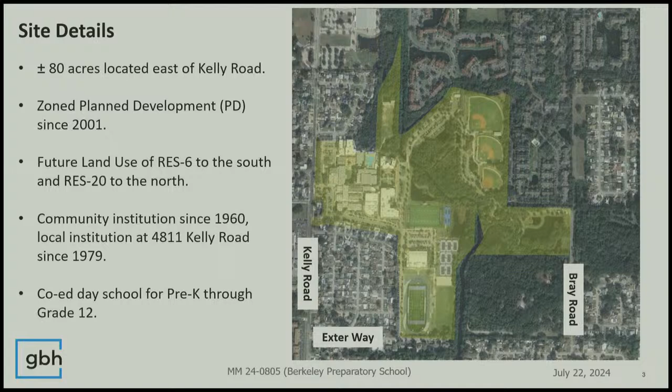So this is for Berkeley Preparatory School. The site is about 80 acres. As you can see, it's a bit of a funny shaped site, consistent with the fact that it was assembled over time. It's in the middle of a residential neighborhood, as befits the Res 6, Res 20 land use. Berkeley's been in the community since 1960, but only on this site since 1979, and it's a co-ed day school for pre-K through high school.

A bit of zoning history: it goes back to 2001 when the PD was initially created, which itself added a further 28 acres to make the now 80-acre site. Then in 2007, additional property was added along with additional access, bringing us to the current 4 access points for the site. Then back in 2020, right at the beginning of COVID, there was a very minor change approved via PRS to create a chapel building.

What we're here today to do is really align the regulations with where Berkeley is today and where Berkeley expects to be in the near term to come.

So the current approvals, for the site outlined, are for 1,200 students, which really ties to what was then seen as the access pattern, about 385,000 square feet. The site plan is incredibly detailed, almost to a Where's Waldo level, so if there are any future updates to the entitlement plan, we've talked to staff about potentially reducing the detail. Candidly, we're trying to get the buildings hopefully approved by this application up and running by the August 2025 school year, so time was a bit of the essence, but it is an unusual site plan, which we'll concede.

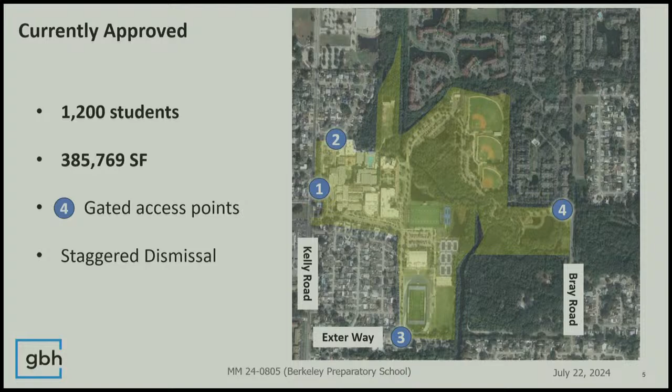And with that, Addie Clark from my team is going to walk through the proposed changes. Thank you. Good evening, Addie Clark, 400 North Ashley Drive.

As Tyler mentioned, the request before you tonight is to increase the student population. It's currently approved for 1,200 students with just over 385,000 square feet. The request is to increase that to 1,600 students and allow just a minimal increase in square footage to accommodate those students. As you can see, the floor area ratio is still significantly below what is allowable today.

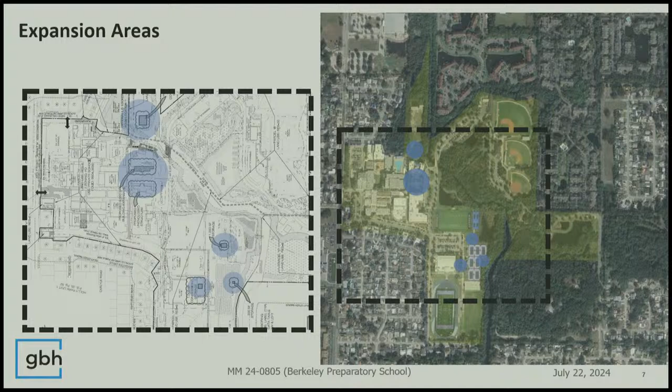The blue circles are depicting the relative expansion areas. As you can see, where we are proposing minor expansion is well within the site, well buffered and not adjacent to any residentially zoned property, and deep internal to the site. EPC did not have any objections to this.

Of course, we will continue to coordinate with them during permitting as usual. As we all know, the Tampa Bay region is booming, and with increases in population comes the need for school capacity to increase, which is why we're before you tonight. Berkeley has been and will continue to be a community institution and a great neighbor. The school will be providing multiple off-site improvements that will promote the overall safety of those traveling to and from the school or within the community in general.

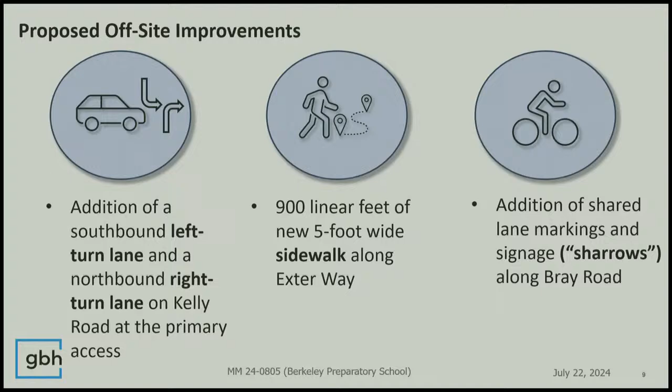Those improvements include an addition of a southbound left turn lane and a northbound right turn lane on Kelly Road at the primary access point, 900 linear feet of new sidewalk along Exter Way, and finally an addition of shared bicycle lane markings and signage along Bray Road. Those various design exceptions and administrative variances were found approvable by the county engineer.

As part of the master plan to allow for this additional student capacity, a very detailed analysis was conducted, and updates to the colored placard system were made to ensure that queuing and parking could be contained entirely on the site. The school has structured drop-off and pickup procedures that use staff and third-party security officers positioned at various locations throughout the site for morning drop-off and afternoon pickup. We've collaborated with staff to update this plan and to account for the new students and to ensure proper distribution among those four existing access points. Again, the majority of the students use Kelly Road where those new turn lanes will be implemented. In addition, Berkeley will conduct an annual monitoring study to ensure continual smooth operations.

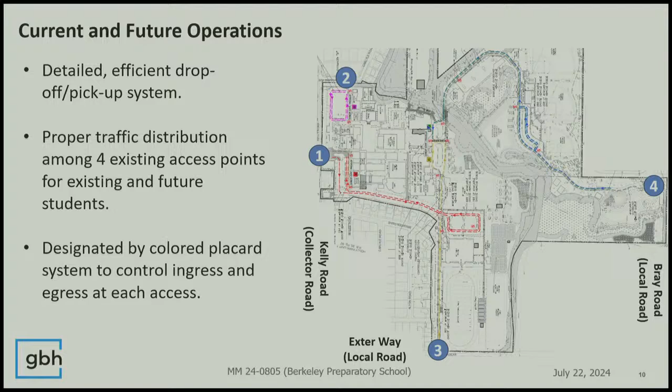This detailed drop-off and pickup plan, special event parking plan, and traffic analyses have been reviewed by staff and found to sufficiently accommodate existing and future students. We're appreciative of staff's reviews and findings of consistency across all departments. Now I'd like to pass to Headmaster Seivold, who's here virtually, to discuss the vision for the future and the need for this request.

Could I ask you one question before we move on? Of course. So I understand the increase in students, and I just wanted to clarify - the increase in the floor area ratio, that 24,000 plus square footage, does that represent new construction? Yes, expansion, new construction. And then the parking will be accommodated commensurate with that? Yes. Okay, that's all I needed. Thank you so much. We can go to the next speaker.

Good evening. Thank you, zoning hearing master. Joseph Seivold, headmaster of Berkeley Preparatory School, now in my 14th year in service to our outstanding institution. I'll just take a minute to say I very much appreciate consideration on this matter. From our founding, Berkeley Preparatory School has a mission that says we need to provide the best possible environment to nurture the development of each child in our care, and to develop a strong sense of morality, ethics, and social responsibility in the students we educate. I'm very proud of our ability to deliver on both aspects of that mission.

Given the time in our school's history, now is the time to expand somewhat - the pressure is on us to add a few more seats, if you will, and some additional square footage. More importantly, in my opinion, to continue our outstanding partnership with Town & Country and Hillsborough County. We work hard to be great partners with the people of Town & Country. I think that's reflected in any number of programs we've instituted, the fact that there's no opposition to this proposal, and I'm pleased to share that the school we have been since our founding gets better every day and will continue to get better, and our commitment will be even deeper with the approval of this proposal. Thank you for that.